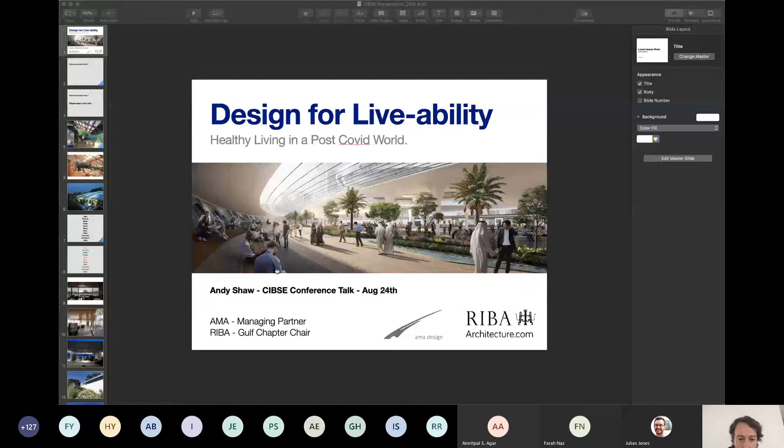Apologies for interrupting, Andy, sorry, we're stuck on your introductory front cover slide. Let's see. Share tray.

Do you see it now? Yep, that works, perfect, thanks. That's okay, better, sorry. Okay, I'll just pop up here. So yeah, I was talking about this one.

So it's ticking all these boxes for being in contact with nature, because I'm going to talk about, in terms of healthy buildings, the more psychological, emotional side of what you need to feel happy and comfortable in a space. Given where humans and how we've come about, we're more used to natural environments, and we always feel more comfortable in them. That's why we always want to be near the sea, and even in the city, looking over a park is more prized than looking at a building.

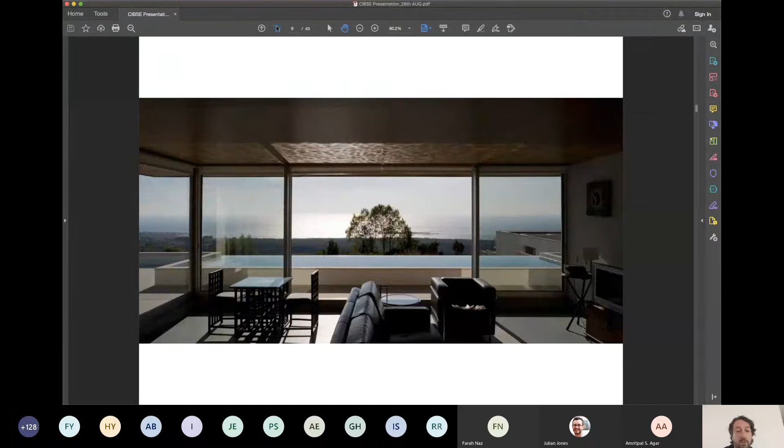It also has an internal courtyard garden, which brings in light on both sides and allows cross ventilation. What's interesting is there's no AC - you can see a little trench heater there, but it's only really used a few weeks a year. Sadly, recently the climate is heating up a bit, and it probably needs some kind of AC put in. But generally this works fully from just passive and natural means. There's a fireplace with burning wood in the winter as well, and you use the sliding windows to bring air through.

It's trying to bring nature in as light, with views to the environment it's in. It's in a rural setting, with the internal garden, which has now actually grown quite a bit, to make a more natural space.

There's a good thing in building in some parts of Asia and Europe, you can get timber and stone much more easily. So here, the main floor and ceiling surfaces are timber and stone to give that feeling. And it's now actually grown with the garden kind of growing into the house, to give it really a much more symbiotic relationship with the nature it sits within.

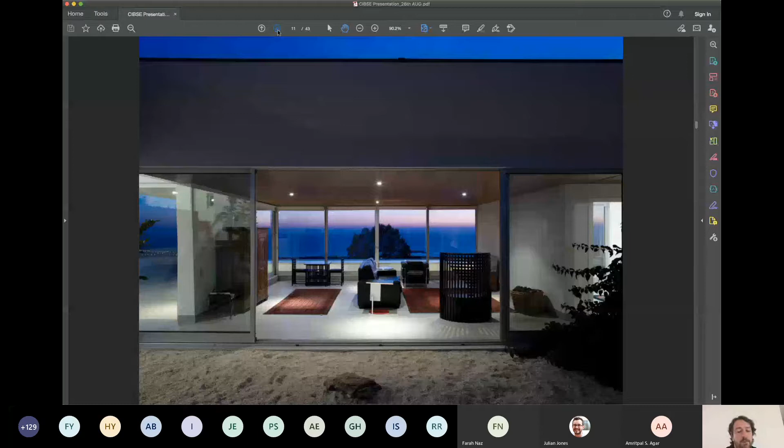But this is just to show an example of how we can design to try and make this a more healthy, comfortable environment. And it's not just the quality of air and things, we have to think of the psychological benefit of having these things. Light and space is very, very important.

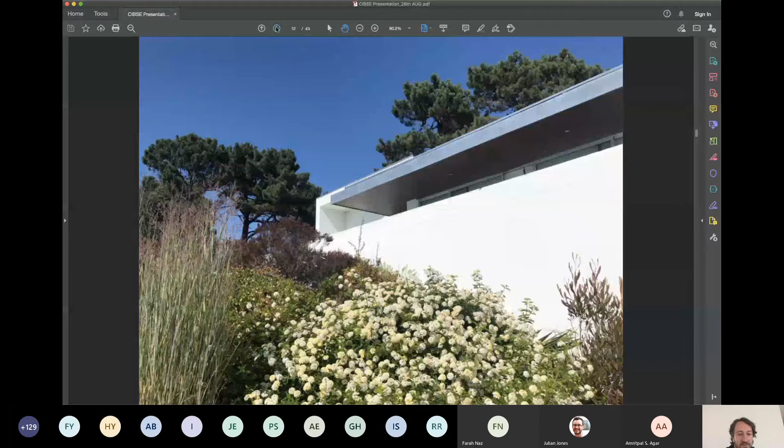Some kind of feeling of greenery, or I think just nature. It can be greenery, mountain, sea, beach. A golf course is kind of close enough to raw nature. So yeah, here's the house set within nature. And this is a project in the Middle East our office has worked on, and again, trying to use stone and get more light into the house and views out, because this is on the Palm.

So I want to talk about the thinking and discussions I've had, working with the Future Foundation and RIBA, about the pandemic obviously changing things this year. But I think it's important to remember, there's lots you see in the media about how to make things more sterile, make restaurants work, and things like that.

But as we know in the construction industry, it takes really three years to deliver a major project. It takes way longer to think about your city planning. So by the time you design a building now, by the time it's finished, I'm sure the pandemic will be over and we'll be dealing with the aftermath. Financial aftermath is going to ripple for a while.

But I think the pandemic is causing some more long-term changes in how we see cities and space, and the whole industry is changing. One thing that's come up is the pandemic has led to remote working becoming more acceptable. So companies are now shrinking their offices and letting people work further away, and they're realizing actually I can have a worker from anywhere in the world.

So workers are starting to think, where can I be? Cities used to be this kind of aggregation of business, like New York and London being big nodes, and Tokyo, Hong Kong, and Dubai probably in the Middle East. But now that's probably going to spread out, and cities are going to have to compete more highly on livability, on what is livability, because you don't have to be in a very dense, polluted city with huge commute times.

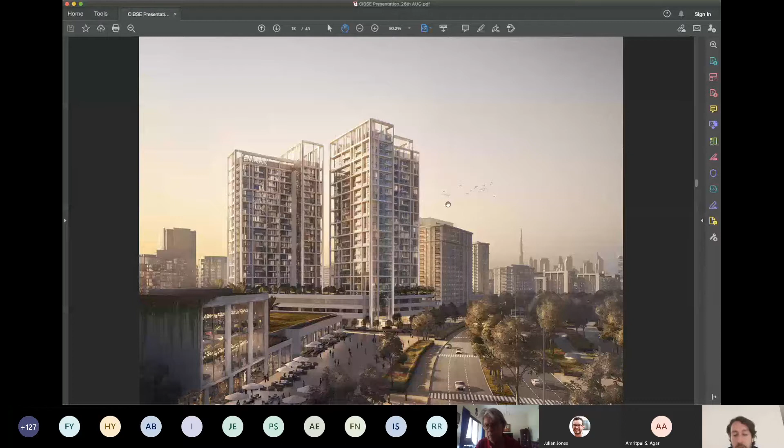It had a connection to a park in front, a kids' play area, and the lobby had a co-work space. There was a podium with a generous pool, barbecue area, fitness area, and the whole podium level was communal areas. There was a common dining area where you could arrange to have dinner with family or friends, rather than just in your own relatively small dining area. So you're encouraging a community as well as giving them space. The lobby had all kinds of activities, more like a hotel lobby than a typical building lobby.

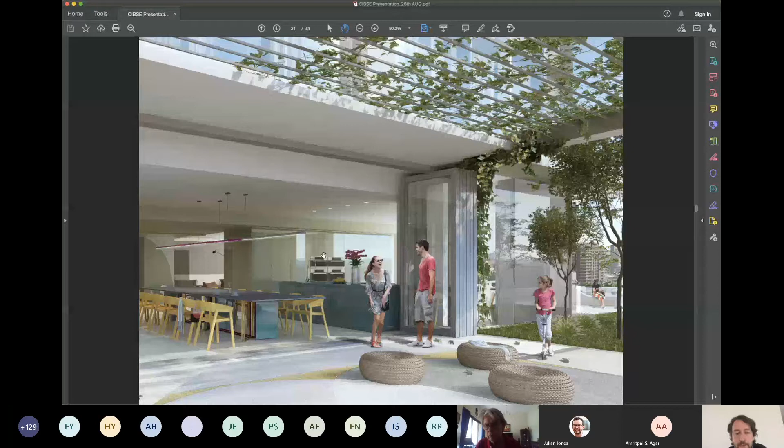This was before the pandemic, but the idea was there, and the rooms had a lot of natural light. The client insisted on having all that glass—normally I'd have a bit less glass in a residential flat, but they wanted to sell this very happy and healthy lifestyle. This led to a few other projects in this kind of typology, but it was something that, before the pandemic, was showing how you shouldn't just see your house as somewhere where you go and sleep. Your whole building can be somewhere where you live and gives you more.

Okay, now I want to talk about expanding up from a building level to what's going on, I think, in the architecture and construction world for the next decade, which I think has been accelerated by this year and the pandemic. I've put here five big themes. Okay, I'll rush through them. These, I think, are the five things affecting our industry the most.

Cities are going to get more green, and we're seeing that in other countries, so we have to think about how we'll do it here. Digital construction is making it cheaper and quicker to build. Prefab is coming back with much more modular working. Sustainability is getting more visible, and then the end of the car era - buildings used to be determined by cars, and that's now changing.

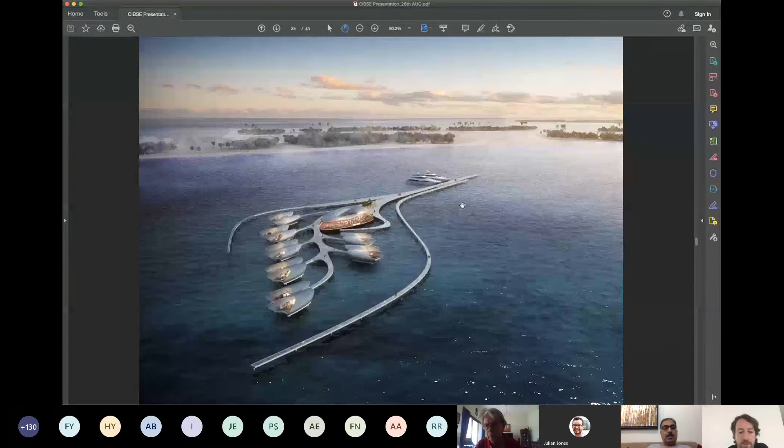This is a prefab project we did for a hotel and spa, again with healthy materials and lifestyle.

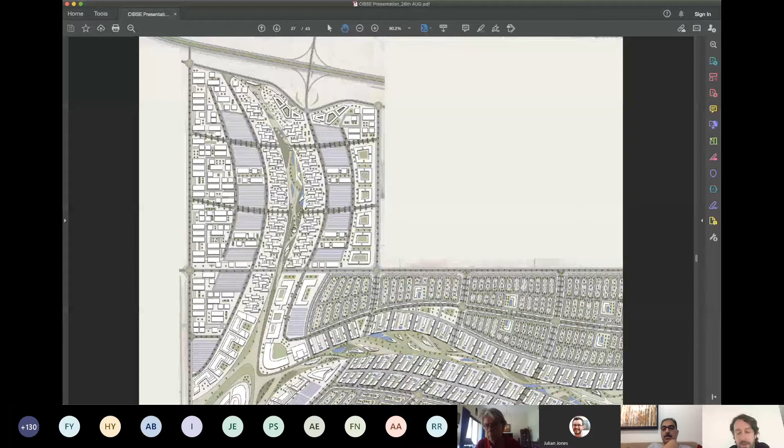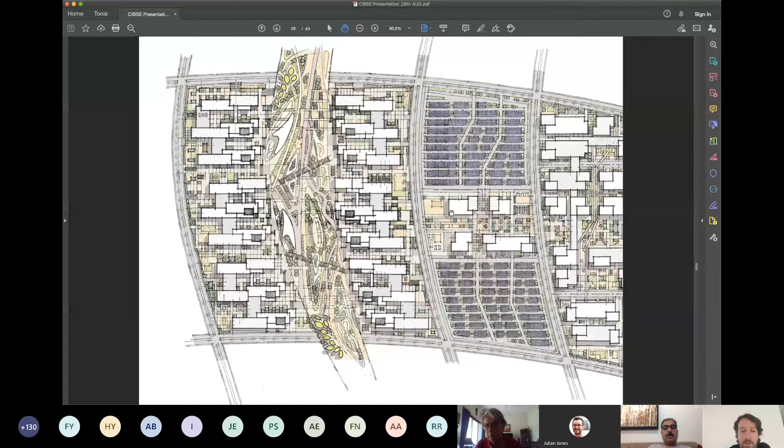This is by BIG, recently announced. There are quite a lot of developments appearing now - new cities that are really pushing the health, sustainability, and mobility angles. Again, lots of electric vehicles, lots more natural environment, and I think that's what's started in the last six months - you're starting to see more and more.

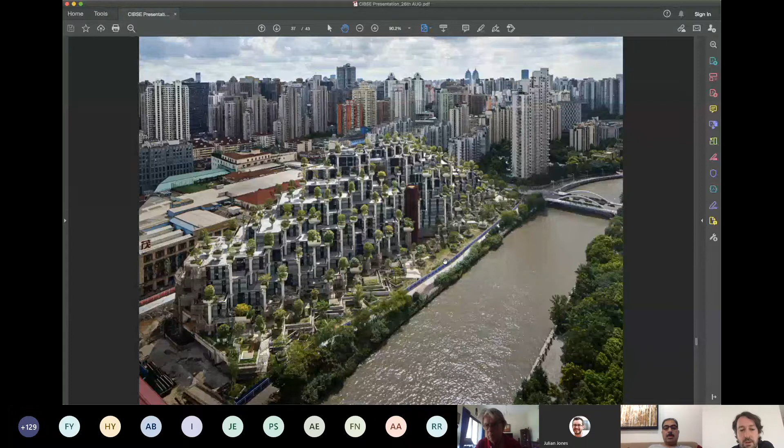How do we handle the Middle East? Because I'm aware of the challenges of doing anything green. But there are some examples that are more regional where it can be done, and you can still make an environment that's more comfortable using light, height, space, greenery, and natural materials to make you feel more comfortable. That is my last slide. So I rushed a bit at the end, but I think I covered everything I wanted to say.

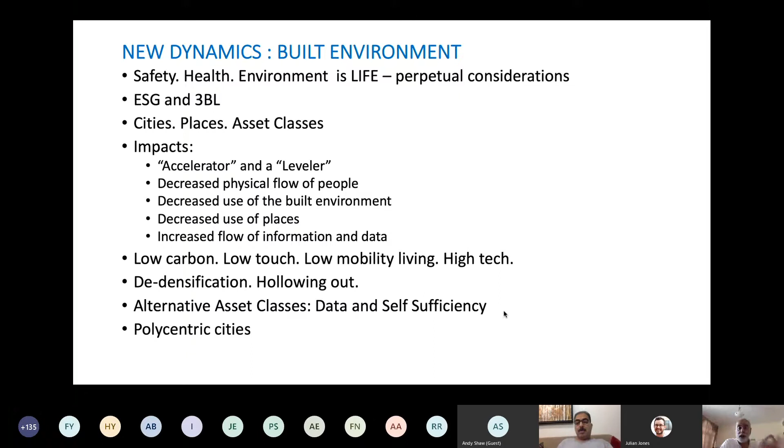I also see some trend towards polycentricity in cities where you may have a CBD and people are moving away to smaller areas outside the city, which have now become polycentric themselves because people don't need to travel to their place of work anymore. So they live and consume within their so-called decentralized polycentric areas. Polycentricity is actually quite an interesting thing that may come about in the next decade or so - sustaining sub-cities that are located away from the CBD.

This is something which is really a work in progress that I'm currently trying to build, which is a resiliency framework for the built environment. I'll quickly touch through a few of these items so I can move on with the presentation. Now, the built environment resiliency framework is embedded on the premise that safety, health, and environment is life.

Based on that, if we look at cities, places, and asset classes, the main objective is for occupant protection and their health and well-being. This is always the first premise now that any developer or investor in real estate would look at. If we can create a safe place and carry out safe place management, then the livability index goes up. And I echo what Andy mentioned earlier - if the livability index goes up, then you are basically creating value for the people.

Now, what has happened in the crisis is there are impacted occupants, and how you actually cater for them is a question that needs to be addressed. It hasn't adequately been addressed by many cities or places or real estate developers, but it will become a very important impact as people move out. How do you retain them within your properties? Because you need to increase the retention capabilities and the consumption capabilities as well, especially if they are retail properties. Introducing safe mobility within cities, places, and assets, both horizontal and vertical, becomes very important.

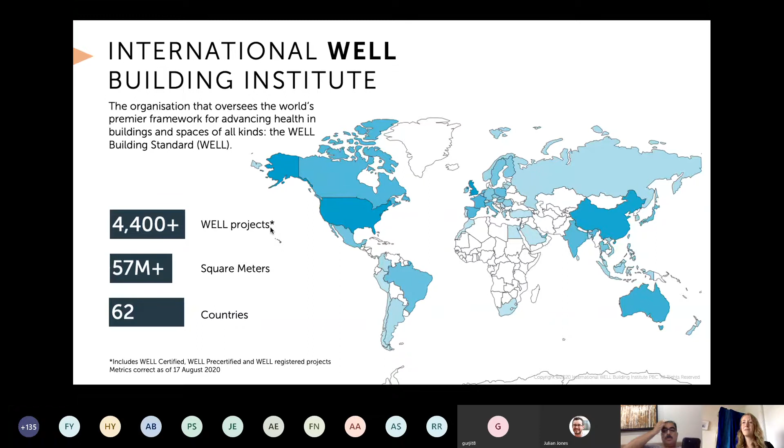Before I start into the topic, I'd like to give you a quick overview on the company behind the Well Health Safety Rating. The International WELL Building Institute has been leading the topic of safe and healthy workplaces for about the last 6 years. Globally, there are over 4,400 projects that seek WELL certification in around 62 countries across the world.

IWBI started off by creating a rating system that purely focuses on health and well-being of people and buildings. The first version was launched in 2014. Since then, there's been a few other iterations as well as the community standards. But for anyone who hasn't come across the well building standard yet, each of the versions I just showed focus on 10 different aspects that impact someone's health and well-being within a building. So you can see here the 10 different concepts that the well building standard addresses on the screen.

These include aspects like Andy mentioned in his first presentation, like connection to nature. Each of the 10 concepts include optimal ways to design and maintain a building, as well as company policies that affect people's health and well-being.

This is really basically where our focus was at the start of 2020. But then in March, at the time when COVID-19 became a global pandemic, we decided to launch a task force on COVID-19 and other respiratory infections. This task force was chaired by renowned experts in the industry, like Dr. Joseph Allen, who works for Harvard, or Christina Gamboa, the CEO of the World Green Building Council, just to name two. The chair and co-chairs of the task force were joined by over 600 experts from across the different sectors and industry. And the goal of the task force was twofold.

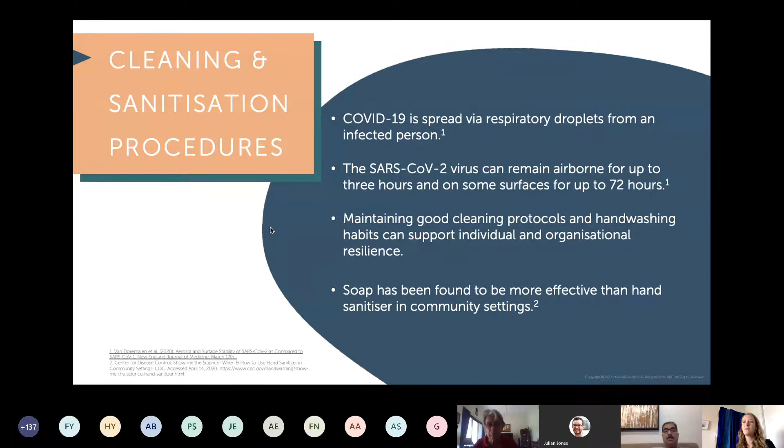There are 4 different features here. First, support hand washing, which is about making sure facilities and soap are available for people to wash their hands, because soap has actually been found to be more effective than hand sanitizers. Reducing surface contact requires projects to identify areas that have a lot of surface contact and determine how that can be reduced.

Then we have improving cleaning practices, which is about making sure there's accountability and instructions on cleaning. The virus is very easy to disinfect, but it requires the right procedures and the right surface to be cleaned, which is addressed in this feature.

As the last feature on cleaning and sanitization procedures, we have cleaning products. Here we're focusing first on products that are effective, but also choosing products that don't cause short-term or long-term harm. Some commercial cleaning products have shown to have ingredients that degrade indoor air quality but can also have hazardous materials within them. Some products can emit substances that irritate the nose, eyes, throat, and lungs, and can cause or trigger asthma attacks. So while using the right product to disinfect the virus is really important, it's also important to choose products that don't trigger other side effects.

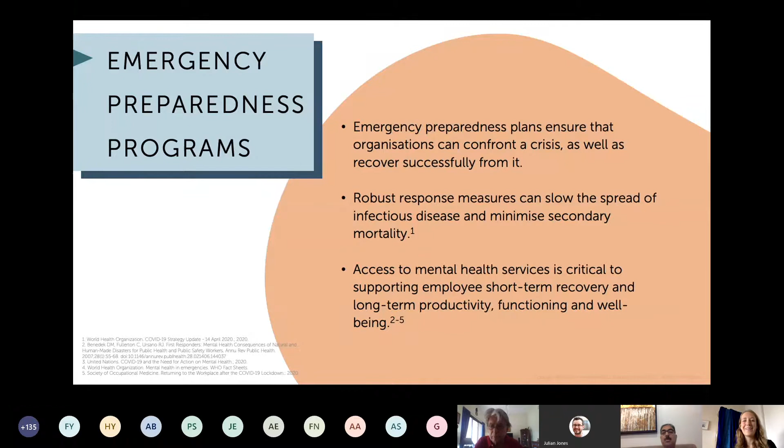The next theme is emergency preparedness programs. In this theme, we are focusing on being prepared for emergency situations, which includes respiratory diseases, but also covers other types of emergency situations like natural disasters, fires, power loss, or human-caused disasters. On the last presentation, you also talked about the importance of emergency planning.

We have 5 different features within the theme. The first one is developing an emergency preparedness plan and communicating it so that everyone in the organization knows their role and actions required if an emergency arises.

Then we're looking at a business continuity plan. We've seen that about 90% of small businesses have to close permanently if they can't continue business within 5 days, which is not very long. But with this pandemic, we've also seen that, not for all, but for a lot of businesses, they have some possibility of modifying their business strategy. Most of them really had to think on the spot about how to pivot their work to stay in business. This feature is really looking at having an advanced plan in place for these situations.

The third feature is planning for healthy re-entry, which looks at different steps the project should take when people re-enter the building. Then we have emergency resources, which focuses on equipment and training for emergency situations. This is not just for COVID-19, but other acute health concerns, and requires things like first aid kits or a defibrillator. The last feature in the topic is emergency resilience.

This last feature looks at ways in which the project can support long-term recovery from large-scale events such as this pandemic.

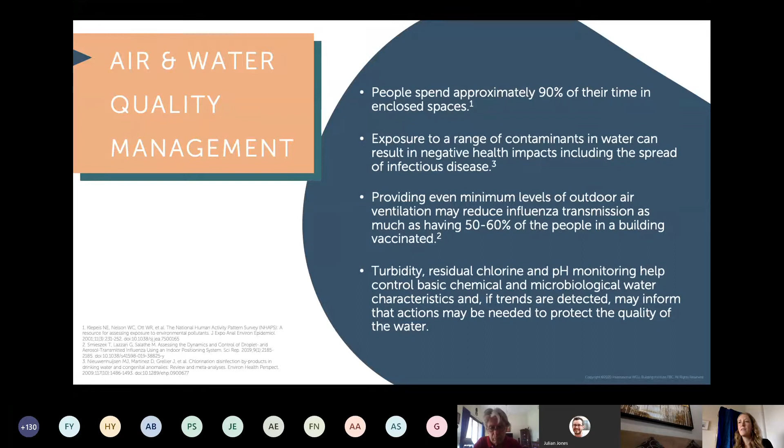I'll move on to the next theme, which is air and water quality management. Here we're focusing on the operation and maintenance of air and water systems, in particular ensuring that the building, which has likely been unused and stagnant over the last month, is ready and safe for re-entry. There are five features here.

The first two involve assessing the ventilation and air treatment system. Projects are asked to review the capabilities of the ventilation system and find out, for example, what is the highest rate of supply air in the HVAC system, and what type of filtration or air treatment the HVAC system can accommodate. This assessment then allows projects to see how much of the guidance provided by recognized industry bodies such as CIBSE can be implemented and what actions need to be taken.

The third feature is looking at Legionella, a very important topic. Projects are asked to perform a risk assessment for Legionella, which is particularly important when buildings have not been used and water systems have been stagnant for some time.

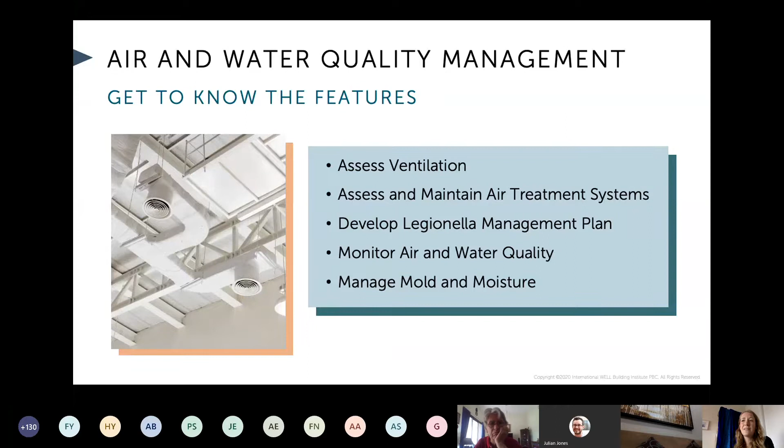The second-to-last feature on the list is looking for further analysis of the air and water quality in the building to identify any issues that need to be addressed. The last feature is looking at managing mold and moisture.

In the last theme - I only have a few slides left - we look at stakeholder engagement and communication, where we aim to increase health literacy and understanding of the types of strategies that have been implemented.

The first feature here is educating employees and building occupants on the interventions of the health safety rating and why these are important. I think communication is going to be key to providing confidence that the space is doing the right thing. The second feature here is...

not directly related to COVID-19, as luckily there's no evidence of foodborne transmission of COVID-19. But it's important that people have confidence that spaces are run in a safe manner, and it reduces the overall risk of foodborne diseases, which goes back to the hospital capacity I mentioned before.

I might skip over this - there's a section for innovation features that I won't go through in too much detail. Then I have a few slides on the process for achieving the Well Health Safety Rating, which starts by looking at the different requirements in our online system.

It's all available online and can be explored through our digital standards. If you then decide to target the Well Health Safety Rating for one or multiple buildings, you can enroll through the online system, upload the feature-specific documentation required, and submit that for review, which gets reviewed by our third-party verifier, GBCI. Once the review process is complete, the building can achieve the Well Health Safety Rating, and you can promote the achievement. There's a renewal required on an annual basis.

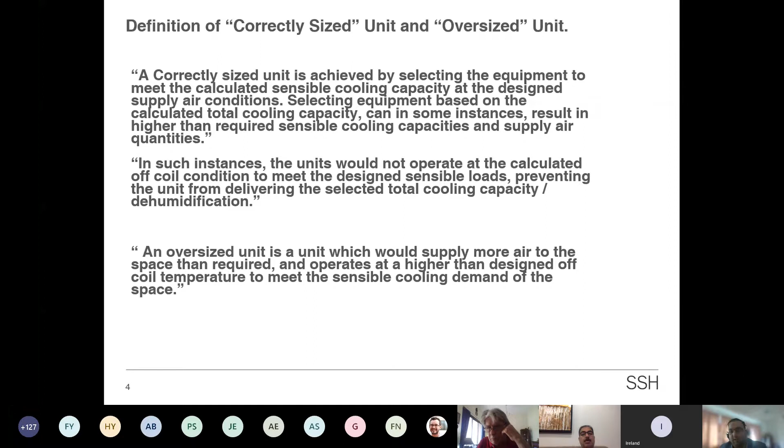Okay, there are several myths associated with oversized units resulting in poor terminal unit selection, which is important to understand. So let's go through it in the following slides. Myth number one: more cooling means better thermal comfort, whereas it's actually vice versa.

Because when you're dumping excessive air, it not only results in poor air distribution and drafts, it also makes occupants uncomfortable, which results in the set point temperature being reached at a much faster rate, giving a signal to the FCU control valve, in a chill water system, to throttle back, or in DX application where you have step control, to switch off the compressor. The result is increased humidity in the space. Both of these factors discussed have direct impact on occupant thermal comfort and thus health.

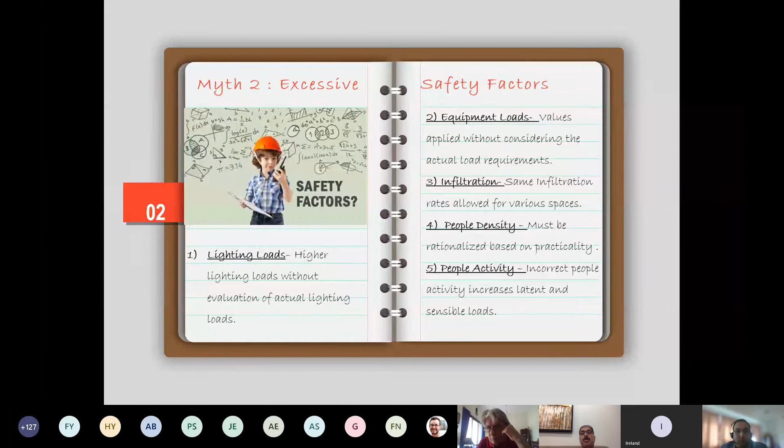The second myth is that excessive factors mean a very safe design. Allowing excessive safety factors in the lighting loads, equipment loads, infiltration, people density, and people activities increases your sensible and latent load considerations in the space, which results in incorrect heat load calculation and thus poor terminal unit selection. For example, if the infiltration rate considered for a small volume of space is 0.25 air changes, and you apply the same factor to a larger room, it will have significantly higher load on the space. So we need to be careful about such things.

The third myth is that higher capacity results in lower humidity, which again is vice versa. Poor terminal unit selection or oversized units results in increased humidity in the space due to its inability to dehumidify, due to higher off-coil conditions, which can result in condensation, mold, and mildew formation impacting human health.

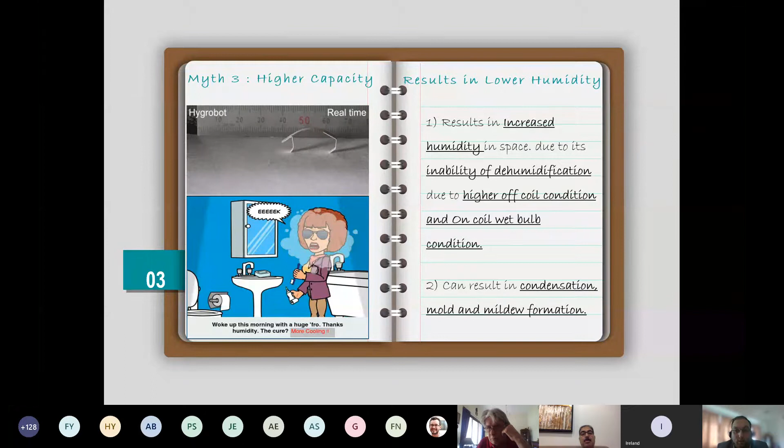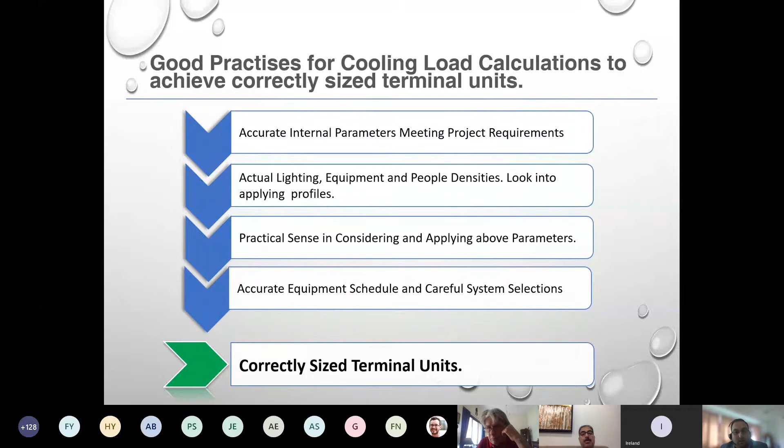So basically, the myths associated with poor terminal unit design should be avoided, and good practices, like some of the points highlighted here, should be considered while doing the heat load calculation for a space. This includes accurate internal parameters meeting the project requirements, actual lighting, equipment and people density loads, applying profiles based on occupancy in the space. The most important thing is to apply practical sense in considering and applying these parameters. We all know the codes and standards, but it's important to apply them practically such that they meet the requirements of the space without oversizing the system.

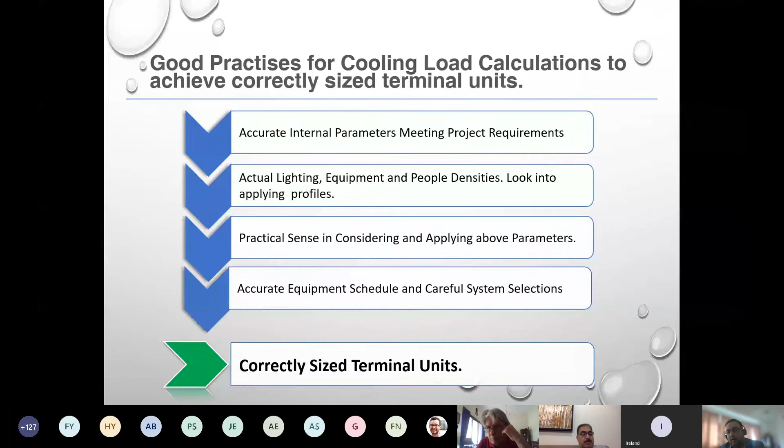And obviously, you have to do an accurate equipment schedule and careful system selection. Once your heat load is actually carried out with good practices, correct selection of the unit is equally important. Otherwise, it defeats the whole purpose.

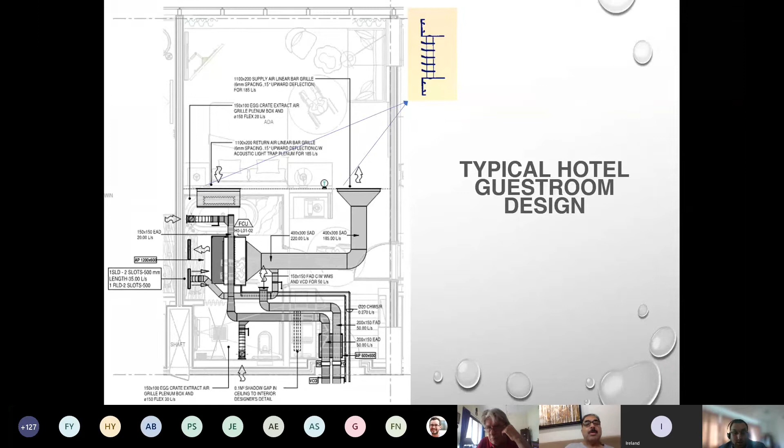In addition, from the occupant health perspective, there are various merits to using lower velocity duct sizes, considering the high possibility of particles, including nuclei, getting carried through higher terminal velocity. So sizing the grills and diffusers to reduce terminal velocity will ensure lower draft and low turbulence, and it also helps reduce the possibility of contaminants getting carried into the return airstream, in combination with sufficient dilution of the space with fresh air, ideally pre-treated.

Okay, so for the material submittal approval criteria, you need to consider a holistic approach.

There's no point taking utmost care on the design side if the final unit selections are incorrect. Thus, the material approval process is very key.

So usually I use two steps: the psychrometric analysis to ensure there are no fundamental issues in the selections received from the manufacturers or contractors, and then the capacity comparison with the specified. So you can do the plots, verify the total and sensible. It should match with the selections provided.

If not, then that raises a question, and it needs to be catered back to the manufacturer. In terms of capacity comparisons, for a sensible cooling application, it's better to select the unit with 0% oversizing of the sensible load or -5% of the specified. That's the reason in this region we design with a safety factor provided by the municipality, and that already caters for it, along with the different speed options within the FCUs which can cater for the slight shortfall in capacity.

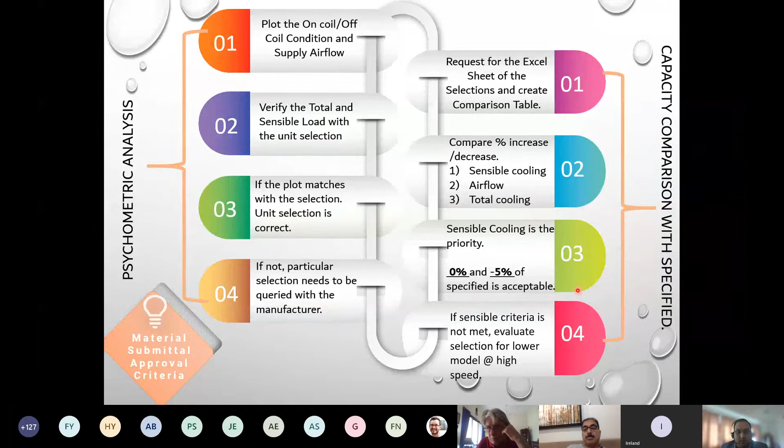Okay, so in the coming slides I will take you through an actual project investigation which was carried out to identify and find solutions for the cooling and humidity issues.

The project was a massive villa community with a mix of villas, duplexes, and townhouses. The chief client complaint was cooling and humidity issues. Various tasks were undertaken, like site investigation, evaluation of drawings, material submittals, and carrying out a heat load calculation to validate the actual installed calculation unit. For the deliverable, we put in an assessment report highlighting the possible causes and possible remedial measures.

In terms of the existing system description, it was a standalone 1-to-1 DX split unit, on-off type, non-inverter, in-ceiling ducted FCUs for bedrooms, dinings, and living rooms. Mid-wall split units were used for the maid rooms, and dedicated extract fans for the toilets. There was no dedicated pre-treated outside air provided; it was only through infiltration.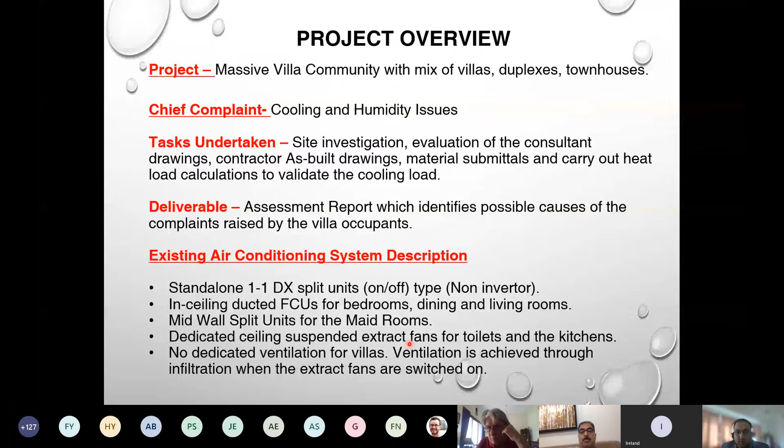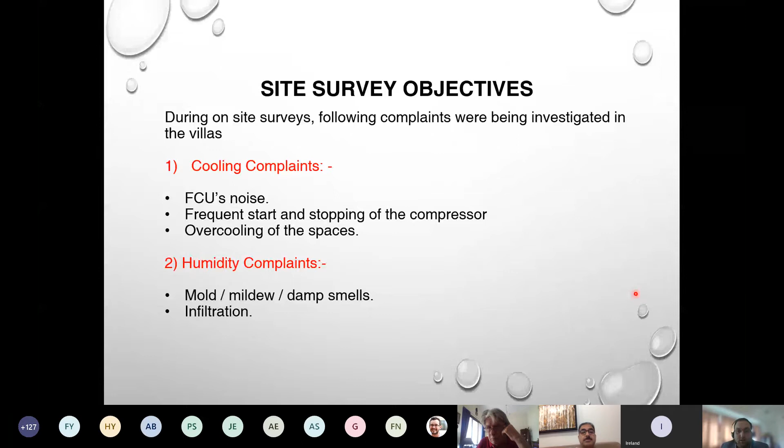The main objectives of the site survey were to identify the cooling complaints from the occupants and the humidity complaints. Occupants were raising concerns on indoor air quality as a result of mold, mildew, damp smells, etc., which is obviously harmful for human health.

One methodology we used for one of the rooms was to put temperature and humidity data loggers for the FCU in the living and dining area. One was placed at the supply air grill, and the other was placed next to the thermostat in the return air.

So this is the findings from the data loggers. This one is the supply air grill. The blue line is the supply air dry bulb, the orange is the relative humidity, which is normally 90-95% RH for the supply condition. The interesting fact is the supply condition spikes up to 15 to 20 degrees centigrade, which is very high for the off-coil condition.

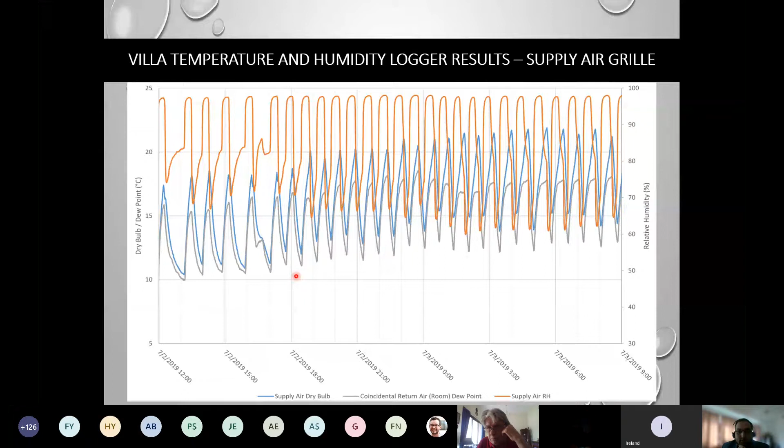Now the spikes you see are the compressor switching on and off. For this instance, it was switching off every 8 to 10 minutes. Imagine every 8 to 10 minutes you have the noise issue of the compressor starting and stopping.

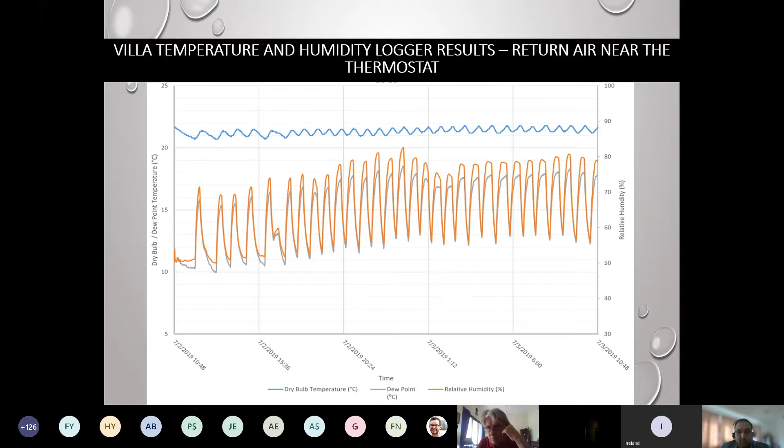This was the return air data logger, where we noticed the return air temperature was maintained within 1 to 1.5 degree centigrade, but there were spikes in relative humidity, mainly because the compressor switching off and on for longer periods resulted in humidity rising, ranging between 53 to 78 percent. So the main finding was that the units were oversized.

This resulted in increased humidity levels, and constant compressor switching on and off resulted in noise complaints. There were condensation issues related to high humidity because the supply air was below the room dew point condition, resulting in a lot of mold, mildew, and damp smells within the villa.

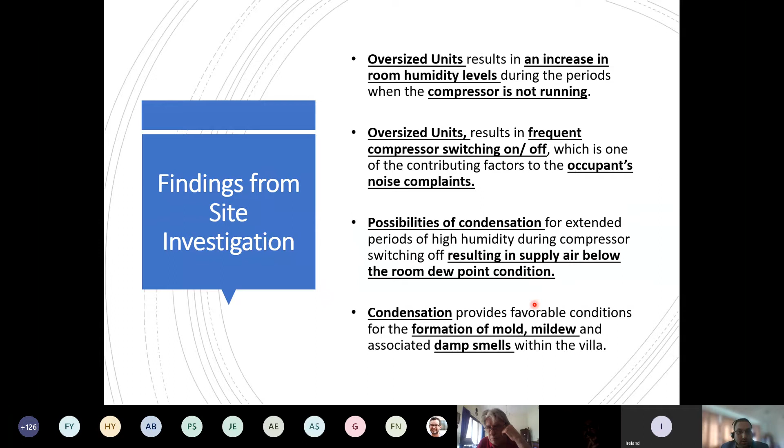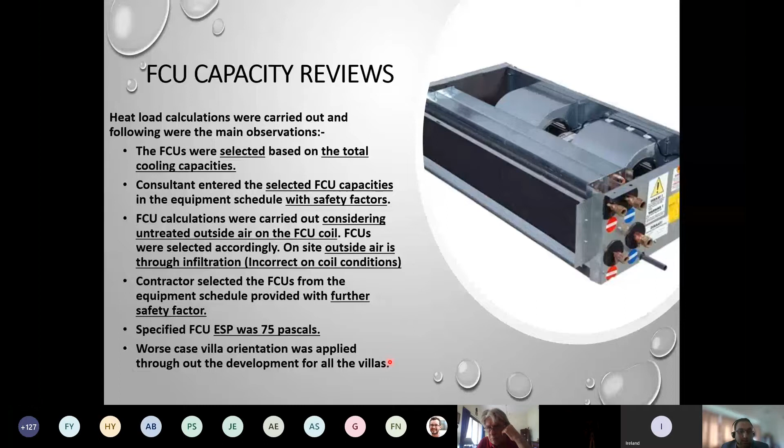When we did the capacity reviews, there were several other issues: the units were selected on total capacity, a lot of safety factors were considered, and the design was for untreated outside air on the fan coil units, whereas on site the outside air is through infiltration, resulting in incorrect on-coil and off-coil conditions. Specified FCUs had higher ESPs, and all villas were calculated based on the worst case orientation.

So basically, when we did the calculation and compared it with the as-installed units, they were oversized by 144% for the living and kitchen units, 154% for bedroom and living, and 103% for the maid room.

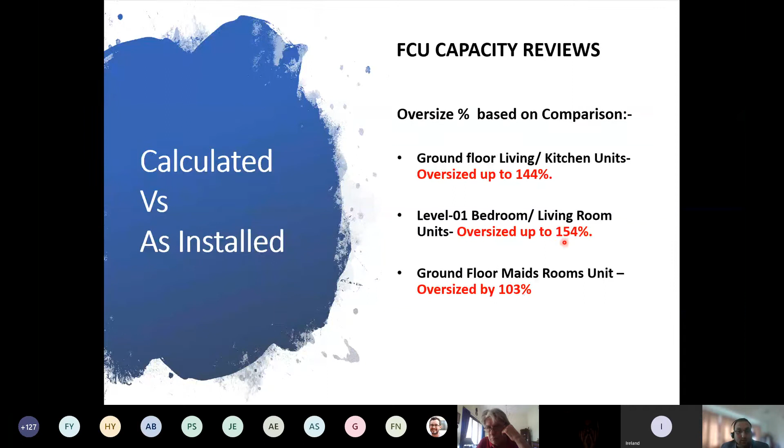So there was massive oversizing. Now when you look at the possible remedial works, given the oversizing factor was so high, you have to actually replace the existing oversized split units and provide treated outside air to keep the space positive. Or we can replace the existing oversized units with new correctly sized units with inverter technology. The last, and least preferred option, was like putting a bandage on the problem: install localized dehumidification units.

That will increase the sensible load in the space to somehow mitigate the overshooting of the off-coil conditions. So the main reasons why this oversizing resulted in issues were poor dehumidification, overcooling, frequent compressor start-stops, noise issues, and obviously health issues pertaining to mold and mildew formation.

When we did that, the resultant humidity at 22 degrees centigrade temperature set point was 54.7%, which was well within the ASHRAE CIBSE defined humidity criteria.

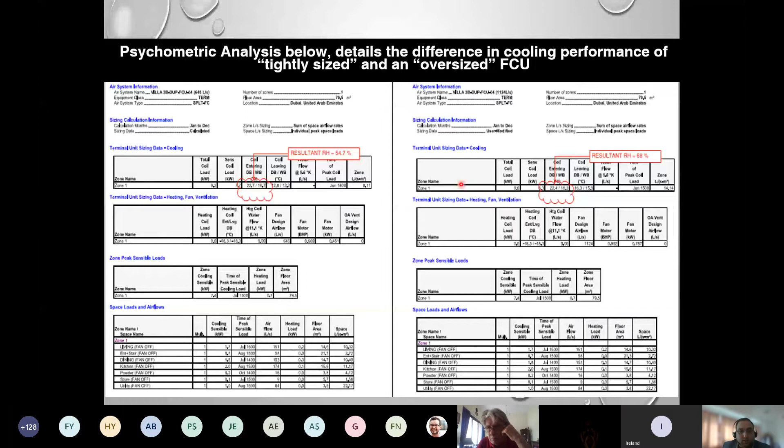You can see the resultant humidity shoots up to 68%, which is not recommended from a thermal comfort perspective. You can also see the impact on the off-coil condition, which has increased from 12.8 to 16.3 degrees centigrade.

Okay, so now if you plot these conditions on a psychrometric chart, it provides a clear picture of the performance of the correctly sized terminal unit versus an oversized terminal unit, based on the same actual practical space input parameters.

You can see for the tightly sized unit, the off-coil is much lower, which results in better dehumidification and lower humidity. Based on the increased supply air, the oversized unit actually pushes up to a higher off-coil condition, which results in little to no dehumidification. This leads me back to the definition I mentioned at the start of my presentation.

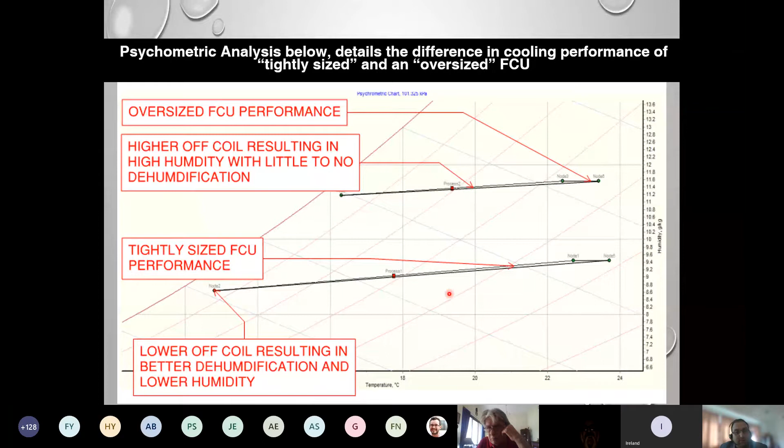An oversized unit is a unit which would supply more air to the space than required, and operates at a higher than design off-coil temperature to meet the sensible cooling demand of the space, which is very prominent from the psychrometric chart. So to summarize, I would recommend as a minimum the following do's and don'ts for proper terminal unit sizing.

Always enter calculated values in the equipment schedule. If you have to group the FCUs together, then the on-coil, off-coil, and capacities need to be psychrometrically matched, and not just put in randomly or rounded off randomly.

Units should be tightly sized for the accurate design conditions. Do not over-specify the FCUs, especially for guest rooms and apartments, as in the majority of cases you have very short duct runs.

Do not apply the worst case orientation heat load for all these spaces, and do not keep control on the return air sensor for the guest room. This is debatable, but my preference is to keep the temperature sensor in the space so it detects the actual temperature.

So all of this needs to be factored in for correctly sized terminal units, to avoid issues like mildew, which impacts human health. With that, I conclude my presentation. Thank you very much, and back to you, Julian.

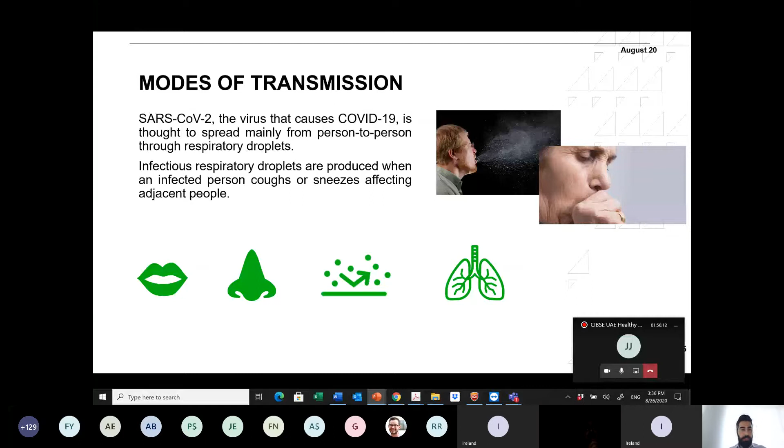So modes of transmission, I think we've all been hearing about this for a very long time. SARS-CoV-2 is the virus that causes COVID-19. It's thought to spread mainly from person to person through respiratory droplets. Infectious droplets are produced when an infected person coughs or sneezes, affecting adjacent people. So for a long time, we've been told to keep social distancing, 2 meters, that should keep you safe.

However, recently, I think things have started to change. ASHRAE from day one went through the way of saying it could be airborne, so let's take the precautions. ASHRAE's statement on airborne transmission of SARS-CoV-2: transmission of SARS-CoV-2 through the air is sufficiently likely that airborne exposure to the virus should be controlled. So that was the stance of ASHRAE from day one.

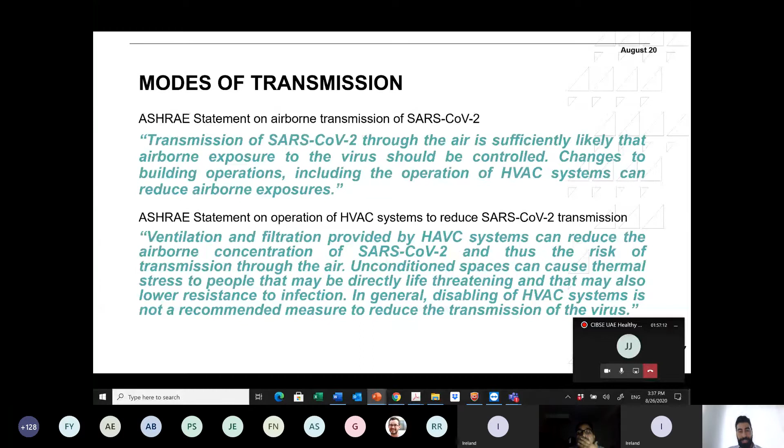Also, ventilation and filtration provided by HVAC systems can reduce the airborne concentration. Unconditioned spaces can cause thermal stress, because some people thought that maybe we should disable HVAC systems. As we know, especially in the UAE and the GCC in general, we cannot really live without HVAC. If you turn off the HVAC, we have other problems like thermal stress and poor filtration. So we should not turn off HVAC. Actually, HVAC systems can help us in reducing the risk of infection.

Now, going into the ASHRAE guidance, there was an epidemic task force set by ASHRAE that provided a set of recommendations that keep on being updated. So if you go to the ASHRAE website, go to the COVID page, there are a lot of resources on building readiness and different typologies like schools, hospitals, offices, residential. And it's mainly around the CDC requirements, and also based on some ASHRAE research from previous and current developed papers.

So for the commercial building recommendations, it's quite similar to residential, but here we're focusing on commercial buildings. First, you need to implement measures that help occupants feel secure. I think that was also covered by Mona earlier. So require occupants, visitors, and maintenance personnel to wear appropriate PPE as per the CDC recommendation. And this is, depending on where you live, probably the municipalities have similar requirements.

Screening and monitoring and controlling circulation of occupants and guests to help avoid transmission of disease by using thermal cameras. We see them here a lot in malls and other places. Some buildings use infrared thermometers. Thermal cameras give us a bird's eye view on who's entering, who's leaving, and show us a better picture rather than just having one person with a thermometer, who could be sitting at his desk, or could be leaving for some time. So having thermal cameras that are recording is good to have.

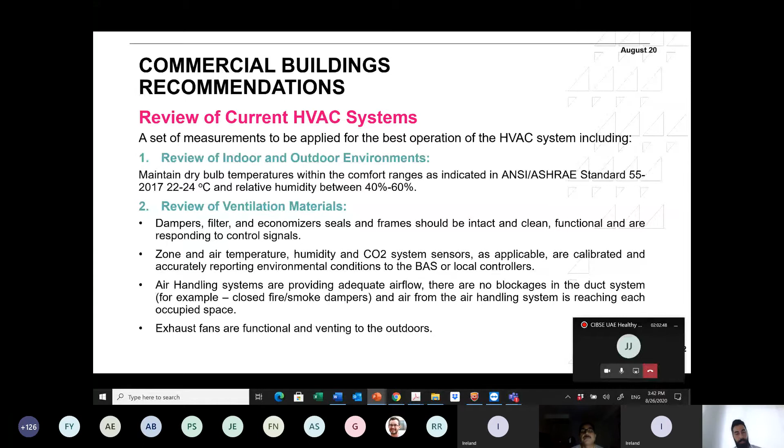Air handling systems should be providing adequate airflow, with no blockages in the duct system - for example, any closed fire and smoke dampers. I've done multiple audits and always find things like a closed damper. There was a sad case in a building where the fresh air was being bypassed to the outside - it was getting cooled down, filtered, making a U-turn and exiting the building without going into the apartment. We were cooling and filtering the air, but that smoke damper was in the wrong position, so we were basically throwing our money out of that exhaust louver, and the required fresh air wasn't getting to the apartments. Exhaust fans need to be functional and venting to the outdoors, especially in toilets.

In terms of operation, continuous operation of all systems is recommended, or flush outs. We'll talk about flush outs in the last slide.

Increased outside air, especially on air handling units - when you can increase the fresh air or outside air quantities, it's advisable to do that. Unfortunately we're in the summer period, so the capacity of our equipment may not be enough. But if you have oversized equipment that can handle the increased outside air, even though it's hot and humid, that also helps reduce the viral load within the building.

For the flushing sequence, if you cannot run it 24/7, you can run it maybe 2 hours before starting the building and 2 hours after occupancy.

Continuous runs of the toilet exhaust system are important. It has been shown in some cases that the virus is being transmitted through drainage systems, so keeping exhaust in toilets running all the time is crucial, especially since toilets are normally small and can have high viral loads inside.

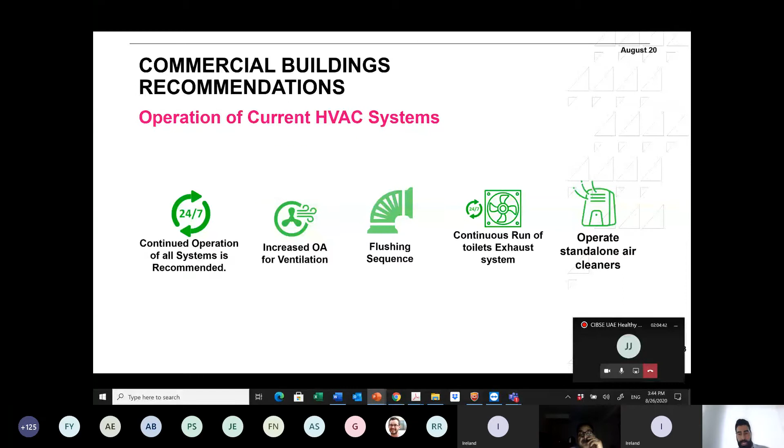Operating standalone air cleaners - portable air filters with very high filtration levels, maybe MERV 16 per the 52.2 standard, or HEPA filters. Some come with UV, some with carbon filters for smell. They're really good to have in congested places, but they're a bit expensive, and you need to make sure they cover the area inside. If your office is like 100 square meters, you can't expect one of those small standalone air cleaners to clean the whole space - you need more than one.

Filters are very important - update or replace existing HVAC filtration. Try to move to MERV 13 on your air handling units, or the highest compatible with the filter rack. Seal the edges, making sure bypass is limited to the minimum, ensuring things are being filtered rather than bypassed. The problem is you might not have enough fan capacity, so when selecting these filters, make sure you check the pressure drops. A MERV 13 from different manufacturers won't always have the same initial and final pressure drop - there are a lot of different combinations, as we've seen from previous studies. Make sure to check different manufacturers and see which one fits within the capacity of your fan.

Using UVGI, ultraviolet could be something you can use. You can install it on the cooling coils to clean them. That will help reduce maintenance of the coils because less buildup of organic material will happen on the coil, but it can also kill the virus. However, you need to make sure it has enough intensity and the air has enough time to pass through.

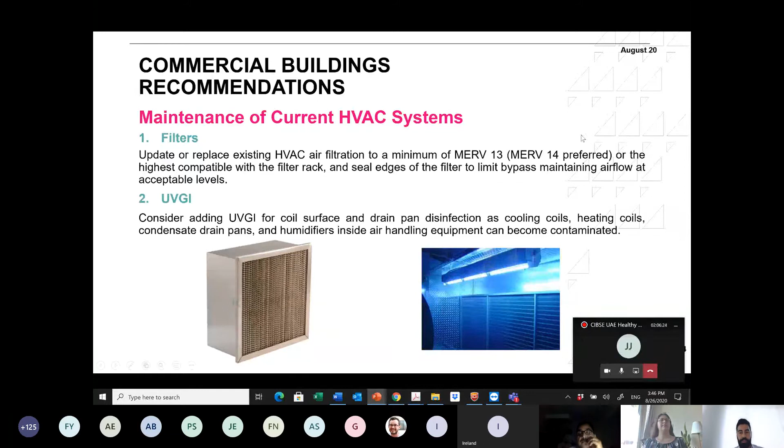A very important thing in energy recovery ventilation systems: there's a lot of misconception and fear about air going from the exhaust to the fresh air. So cross-contamination does happen on energy recovery wheels and on plate heat exchangers. Make sure the system is running properly.

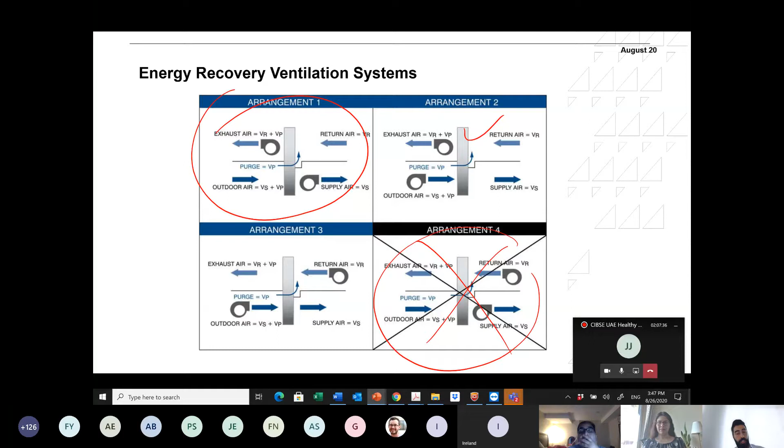Now, what do we need to do with these heat recovery wheels? I've seen a lot of clients trying to turn them off, but you cannot turn them off in this heat, because you'll end up with very high humidity in your offices or apartments, since these wheels take a lot of the latent and sensible load out of your fresh air load.

So for the wheels to run properly, the exhaust shouldn't go into the fresh air. If the fresh air goes into the exhaust, that's no problem from a coronavirus point of view, because the exhaust is not being sent back to the building. From an efficiency point of view, either direction of leakage has an impact on efficiency.

But from a health and safety point of view, we always want to avoid the exhaust going back into the fresh air. So we need to make sure the leaving supply static pressure P2 is at least 0.5 inch greater than the entering return pressure, or the exhaust pressure P3. At all times, SP1 and SP2 should be higher than SP3 and SP4. You need to do these kinds of measurements on your system to make sure you don't have leakage from the exhaust to the outside air.

If that's the case, keep running your wheels, no problem at all. If you want more information, ASHRAE has published a document just talking about energy recovery wheels. You can find more information there.

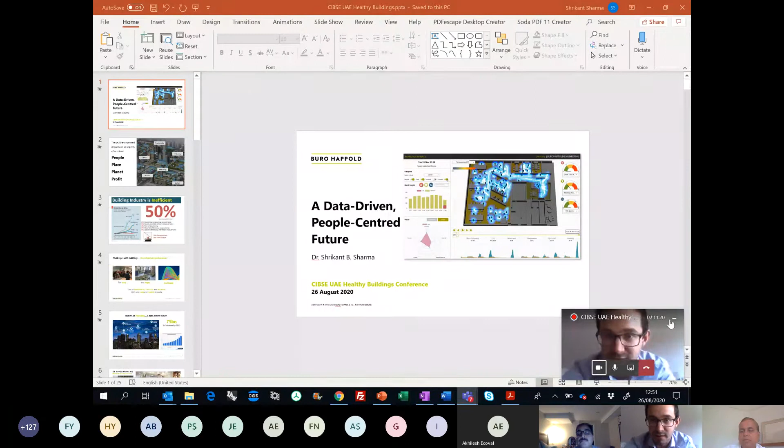Thanks very much, Julian. I hope you can see my screen so I can get cracking, yeah? Yep. Okay, perfect. Thank you.

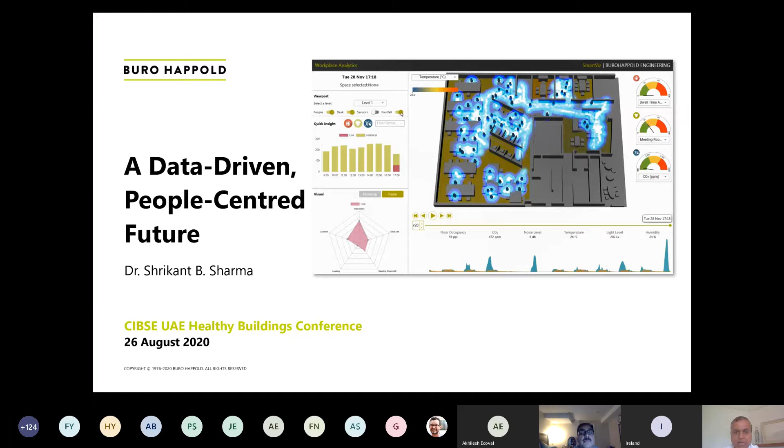My name is Shrikant Sharma, I work for Buro Happold. I am a mechanical engineer, but I'm not practicing as one. When I look at an HVAC system, or pretty much any system in buildings, I'm looking at their impact on people and how we can use data to drive decisions that enhance four key groups of KPIs, the metrics we know our built environment has massive impact on: people, place, planet, and profit.

It translates into a lot of really interesting conversations and presentations we've had today, which is health, well-being, productivity, but also safety and vibrancy, and carbon. We know how significant the disruption COVID has caused into many of these parameters, fundamentally about how we as people occupy these spaces and how we'll be going forward.

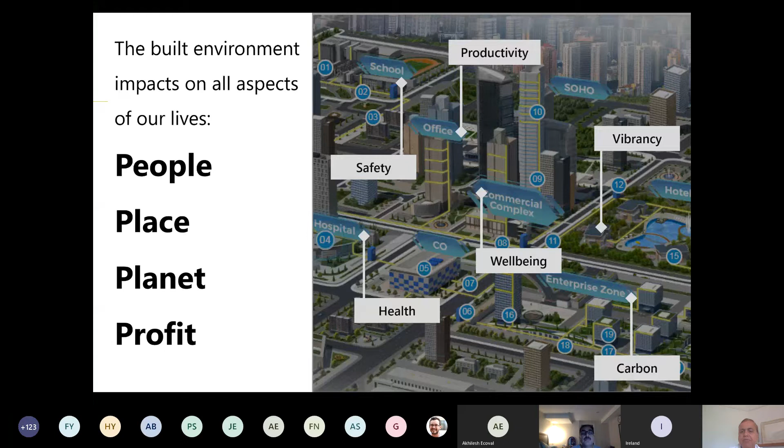So a lot of my time and my team's time over the last couple of decades has gone into studying human behavior, how people use these buildings and spaces, and how computational modeling and new data-driven thinking can help us create better spaces.

There's a couple of big challenges with the significant impact that buildings make to the world. One is about efficiency. We know the material, labor, and productivity challenges that have been around, and it's getting better, but it's an ongoing challenge we have.

The bigger challenge for me is the uncertainty in the performance of buildings. Often it comes down to efficiency in terms of energy and performance, but it's also about people, the experience, the productivity, and the uncertainty in being able to predict how busy, how empty, how vibrant, how engaging a space is going to be. That's one of the biggest handicaps, I would say. And the driver for this handicap is just our understanding, which means data, and it means insight.

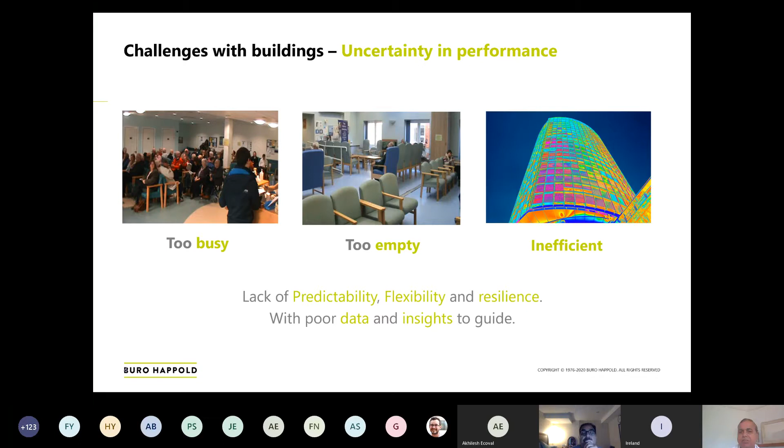So how do we bridge this gap? Now, fortunately, we're moving into a world where there are billions of devices and sensors behind each of these systems, helping us get a better, deeper understanding. But it's still the question of how do you take all that data and translate it into space, people, planet, all of the parameters we talked about. How do you make it really easy to digest and engaging to the whole supply chain in the industry?

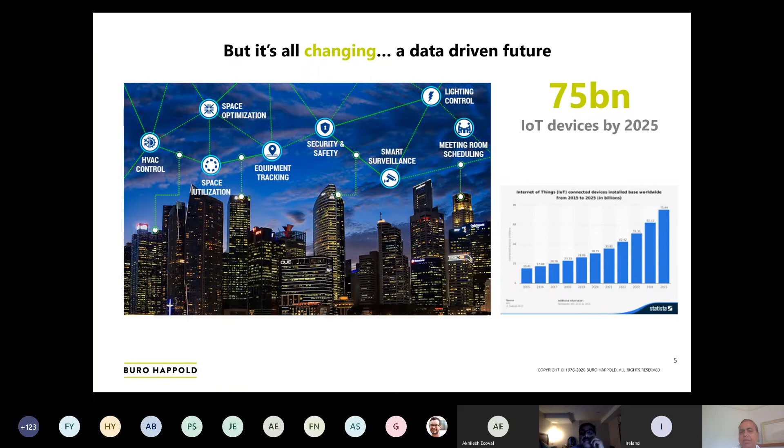So here's an example. Those sensors, we worked with Current by GE and with Vodafone, fitted some of their office buildings with sensors in the lighting and in the ceiling, and they were measuring all sorts of things, including human location and movement, space utilization, meeting room utilization, etc., and also temperature, humidity, and energy.

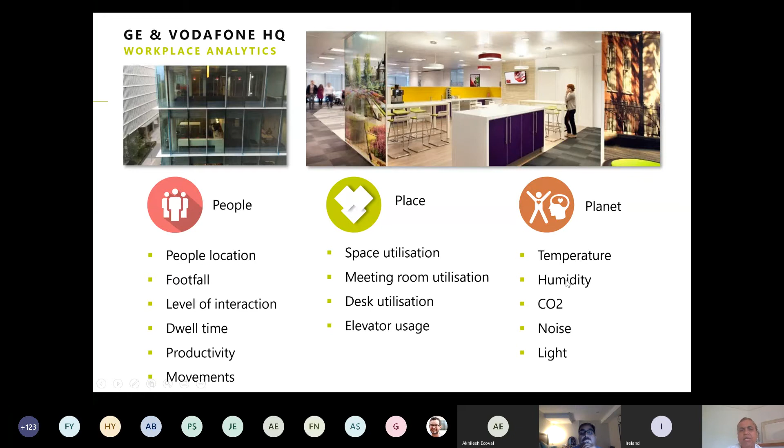What we did was put those onto a very simple dashboard to start to gather all the usual information about CO2, noise, temperature, lighting, humidity, etc., but also information about people, and the ability to then start to look at the interaction between all of these, where people were spending their time, how long they stayed at the desk.

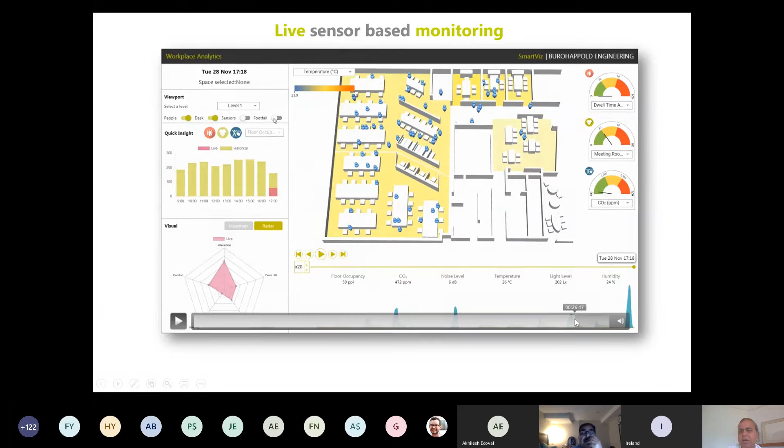And all this data is human body heat scanning, so it's all anonymized. We start to see occupancy of seats, of meeting rooms, in cafe areas, when people are going past one another, and where they bump into each other and start a conversation. Some of these KPIs start to become the driver for what a good working environment looks like.

So we were able to start to dig into things like: most of the meetings are really only occupied by up to a couple of people when they're designed to be much bigger. So you could quickly conclude that you can save a lot of that meeting space.

The CO2 level mapping on top of where people are actually spending their time, we could see that a third of the time was exceeding the CO2 threshold. So there's a productivity gain you can have by providing the right level of fresh air at the right place, right time. And then, of course, the less tangible, which is when do people interact, where, how long for, what drives it, and what can you do with all that information.

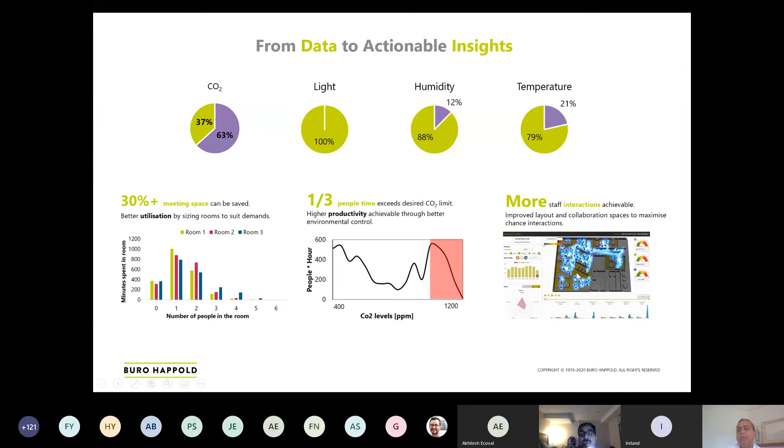So we started to use some of that data. But like I said, my interest is always about getting all that data and looking at the ultimate impact for the organizations, which is around the people, place, planet, and profit.

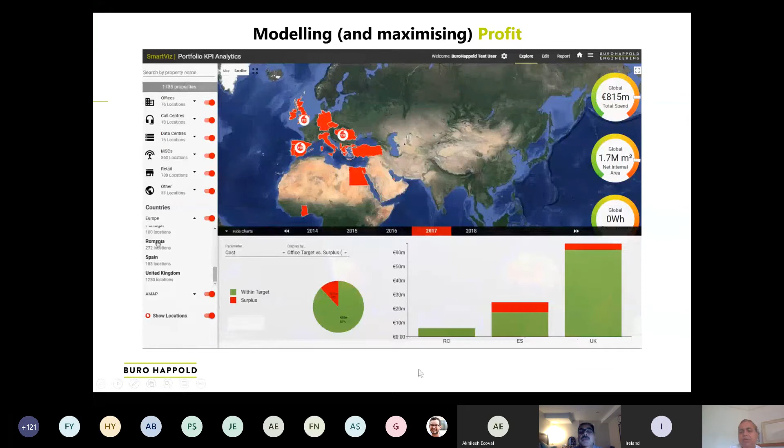In this case, we stepped back with Vodafone and created a simple platform that mined data from 1,700 plus different properties across the globe, $1 billion spend a year. We were quickly able to analyze and compare those different assets to see which ones were more efficient, what was it that others were consuming more cost, and we were able to very quickly demonstrate how you could save a significant amount, 40-50 million worth of cost from their portfolio. So really getting that data to firstly understand very microscopically what's happening, to zoom out and say, what does it mean in terms of the asset performance?

While gathering all of this data, we are also looking at getting a deeper understanding of how people use spaces. This is an example on office, but we do museums, airports, university buildings, pretty much any environment where you can grab this data of various sorts and then start to build a predictive model.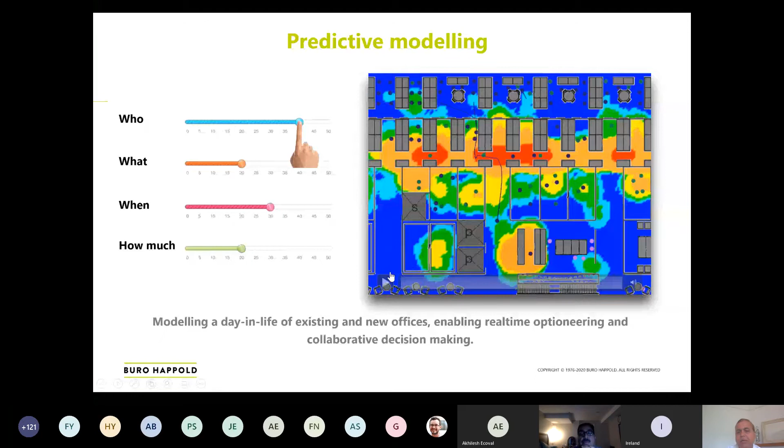So now we are saying, here's a new design or an existing design of an office with different layouts. By being able to manage who goes in there, staff, visitors, different departments, what they do, when and how much time they spend, etc., I can actually start to see what a typical day in life of this environment is going to be like. By modeling, we can now start to see different KPIs, like where people are spending their time, utilization, but also where they're likely to collide and interact with each other. So I can very quickly do different environment, different options.

Option 1, where it's more external periphery circulation, versus option 2, where it's much more centralized - it's workplace, elevators, cafes. These simulations of human behavior are quite advanced now. You can start to see even microscopically what's the layout, how many elevators and all. This is making it now super accessible.

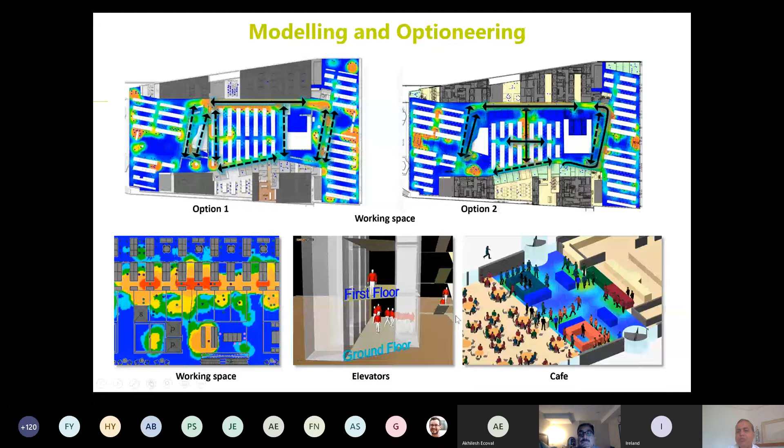And it's not just what happens within that environment, but you could take pretty much any space and say, what's the value of that little development? We talked about some of this before, the concept of healthy building or high performing building or space has got so many components. What's the view? What's the access, the daylight, the interaction, the productivity and noise level and all that?

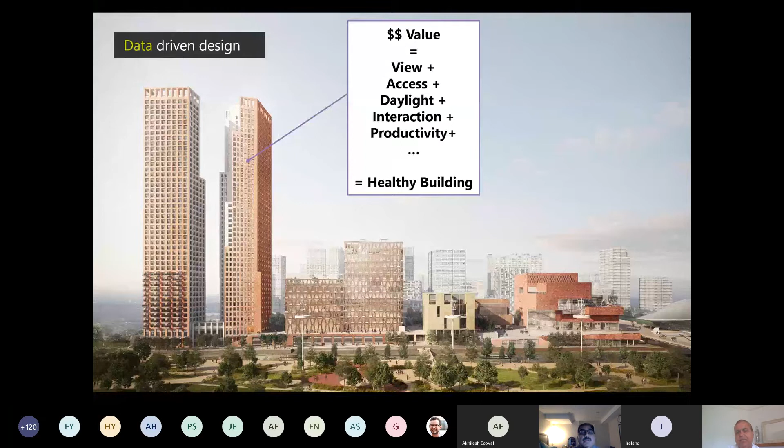Could you, using the same approach as before, with having understood through data how humans use these spaces and how they perform, also build design tools, simulation tools that give us, in a very real-time sense, a model where I could be at the master planning stage, massaging the shape and size of the building, the height, the orientation, and start to see what impact that will have. Once I've set up my parameters, I can really churn through thousands of different options, and each option should give me a score about each of these parameters. If I could do that, I've got a tool where at the very early stage of design, I could be predicting and modeling, and therefore be better in control of those parameters that I care about.

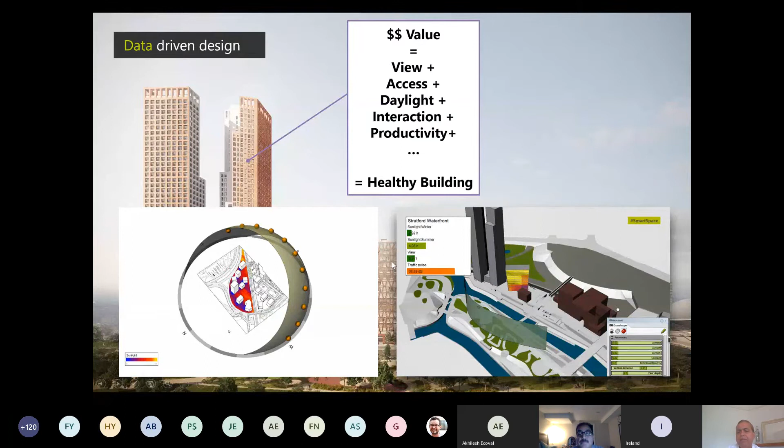The analytics and the simulation technology is moving at such a big pace that you can now start to do some of this simulation in a very early, conceptual stage, where you may just have a little sketch. On that sketch, given the behavior of people in a typical day, I could be looking at that front desk or that security entrance to an office floor next to the elevators. What's the right optimum orientation?

And it's not just inside the building. You could also do it on a master plan space. So how do people use the space between the buildings? And what happens if I was to pretty much in real time draw a little wall there, a little water feature here, how I could influence that human behavior in the different usage scenarios. This is where we start to co-create a lot of these solutions with the design, with the architects, with the client sitting in the same environment.

And sometimes now we are even beginning to empower the client with tools like this one we did for Heathrow Airport, where they could be planning these scenarios in real time on a web-based tool and be testing what impact, how much staff they need to have in immigration, in check-in, etc.

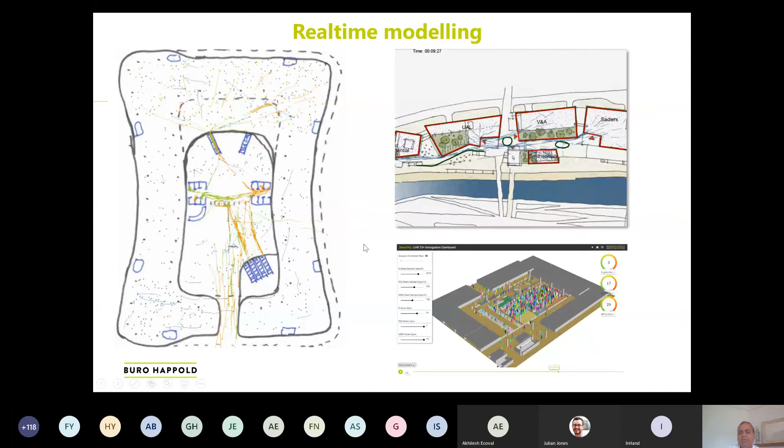Clearly, data and the human behavior research has been driving a bunch of good research and development, and really taking away reasons for us to have too much space for that inefficiency or lack of productivity or better performance.

And we thought we were getting there, right? And then came COVID, which absolutely disrupted in a massive way how people are using all of these spaces we are talking about.

What does that mean in terms of our use of space at home, in the office, elsewhere? If we were to come back under social distancing, what would the office look like? So we started doing research using the same tools and understanding data, but also looking at the changed behavior and the changed occupancy level in the office.

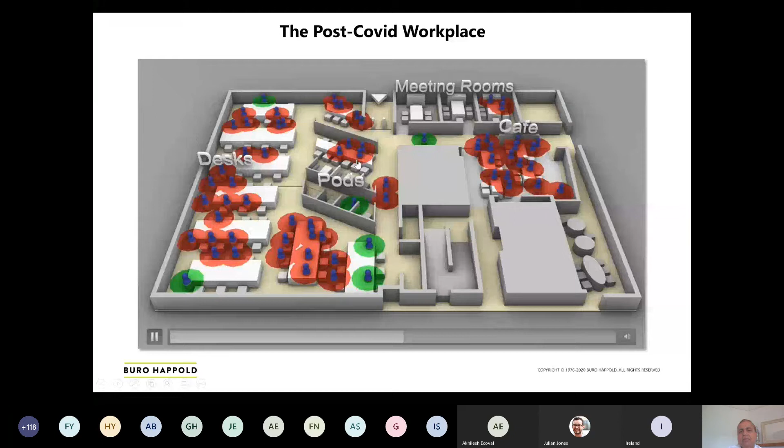Using predictive modeling, we are now looking at if every person was walking with a 1 meter radius around them, every time the two circles intersect they turn red. You start to see very quickly that our current office design is not really conducive. You have to bring the occupancy levels significantly down if we were to work with social distancing.

And we ran then 20, 40, 60, 80% of occupancy. And you see that somewhere here is where you can get back to the office without changing too much.

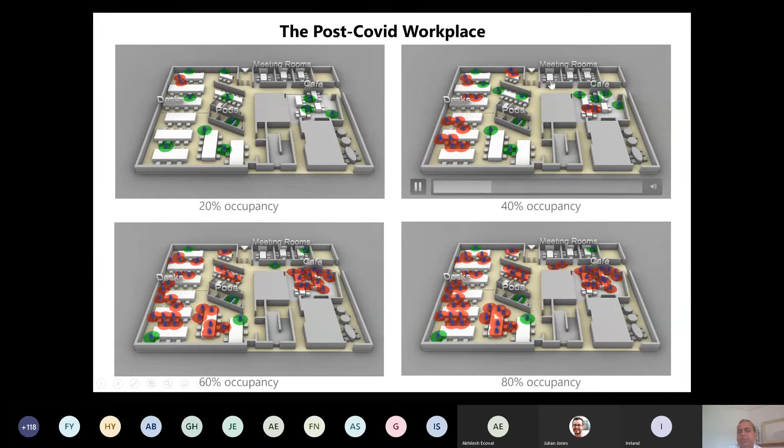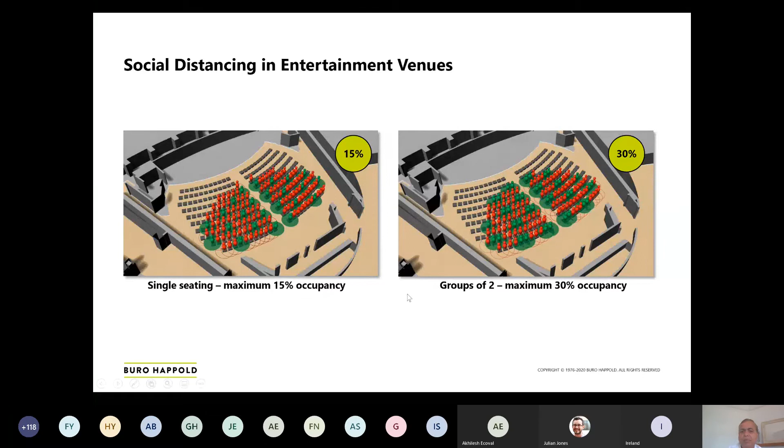This is one of the dimensions where you can start to see how you can bring those tools into the design of the future office buildings, and not just office buildings. We've also been looking at theaters, lecture rooms, classrooms, in schools and university buildings.

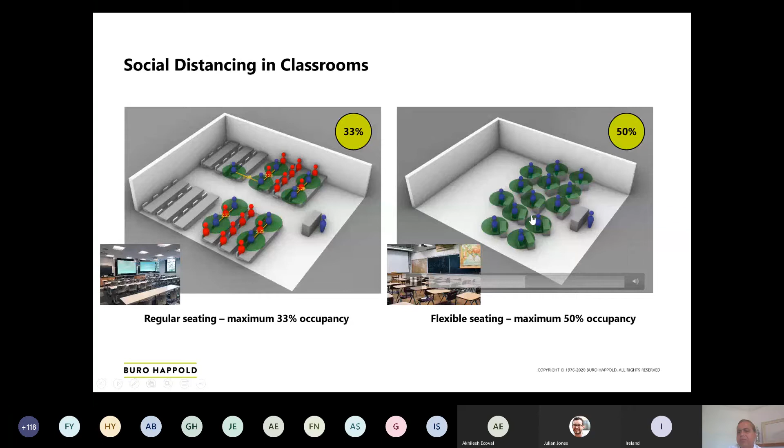What is the percentage that's safe without changing too much, and then how you can increase that by reorganizing the spaces? What kind of operational policy do you need to have in place to manage social distancing, one-way stairs that are up only and down only, etc.? So this is how you could be looking at maximizing, still keeping the level of interaction and the operation going, with as much occupancy as you can.

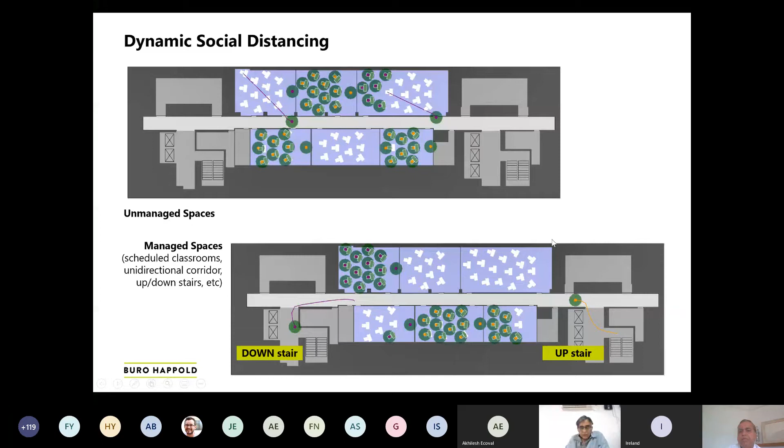We are in fact partnering with a great number of universities in the UK, where we've developed this methodology, firstly for this interim period where you've got COVID, therefore the social distancing need, with a set fixed amount of space that the universities have. What does it mean in terms of a static spatial capacity for each room?

How could you add a temporal component? Do you bring students back for 5-10 hours a week? Is that in a chunk or is that distributed? What does it mean in terms of overall capacity, timetabling? What does it mean in terms of the whole campus flow and internal building flow?

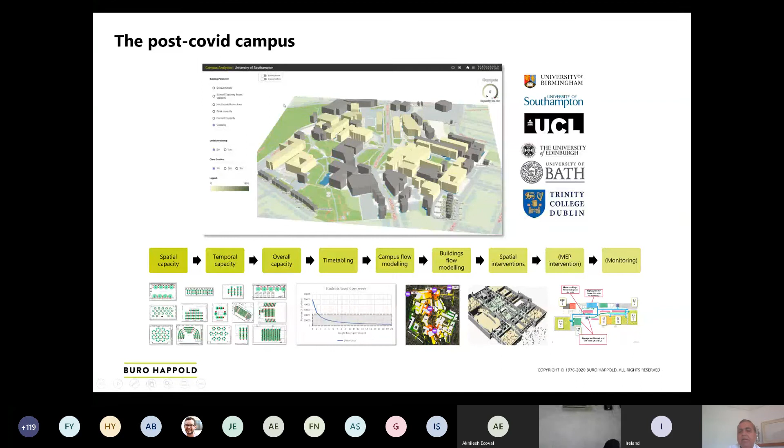Going over to saying, as we develop a deeper understanding of the interim period and manage it, what does the future look like? How do we make our buildings and spaces more resilient, more flexible, for better maintaining health as we get back to the new normal, which we know is going to be pretty different.

All this, we don't quite know the future, but really using data and our understanding of human behavior and how it's evolving through all this period is going to help us prepare for whatever that future is going to be. So that's me, a whistle-stop tour of data and people-centered future.